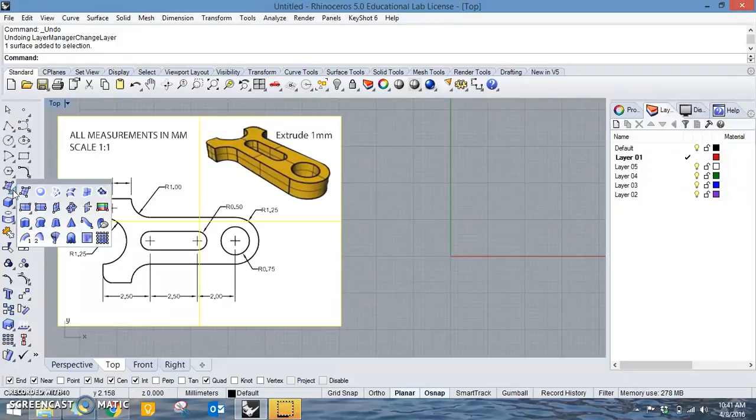Okay, here's a video to actually share with you how to draft out that part and then extrude 1 mm high. Okay, the first thing you want to do is to insert picture frame and drop the image here. Rather than going to and fro to check the drawing, you can always insert the image as a reference. Okay, how do you actually do it? It's similar to the Android and Adidas logo. Go to here and then insert picture frame.

Okay, the next thing, after you studied the drawing, everything is in mm, 1 mm, 0.5 mm, 0.75, 0.5. What you can do is to go to File, Properties. Under Grid, you can always drop your minor grid lines. Rather than it's at 1 mm, you want to drop it at 0.1 mm so that your artwork in Rhino doesn't look too small. It's appropriate to the gridding.

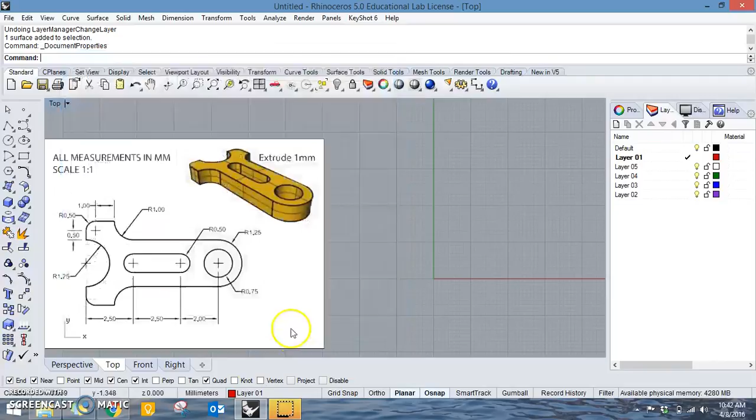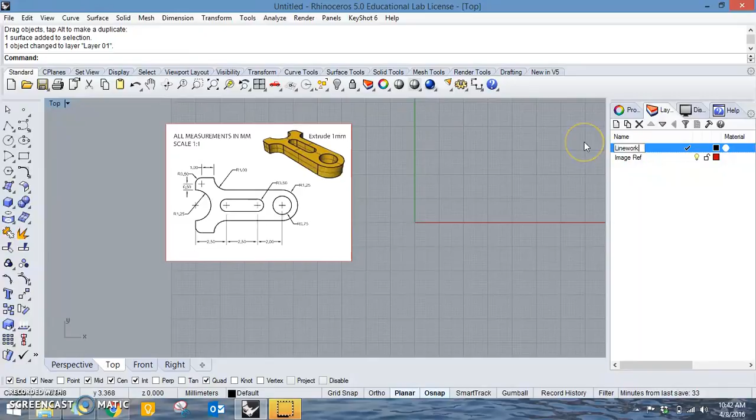Okay, next we can do is to organize our Rhino. Delete what we do not want. We can always drop this change object layer, call this image reference, and then rather than call it default, we call it line work. Okay, so now we can start to draft.

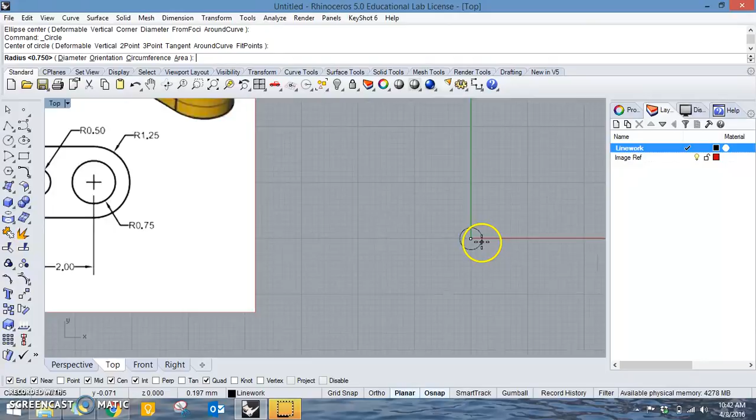The first thing, if you notice, why not we start off with the circle. Okay, let's just find a center anywhere. You want to make sure that it's in radius, not diameter. So the radius is 0.75, enter. Okay, the next one is a 0.5 radius here. So what we can do, snap to center, 0.5, and then it's actually 2 mm away.

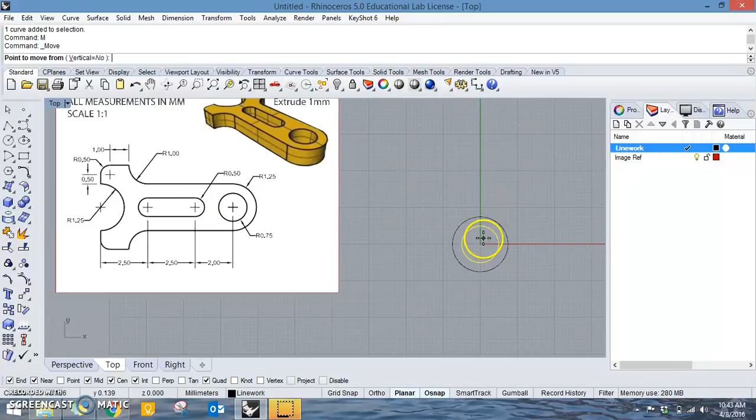Next we can always do move 2 mm away. Let's shift this over. Okay, another one more will be here, the 0.5 at 2.5 mm away also. So copy, paste, and then move it 2.5 mm away. So once that's done, you can always draw a line on the quad or the ends. Okay, let me just off this. Let me just off mine here. Okay.

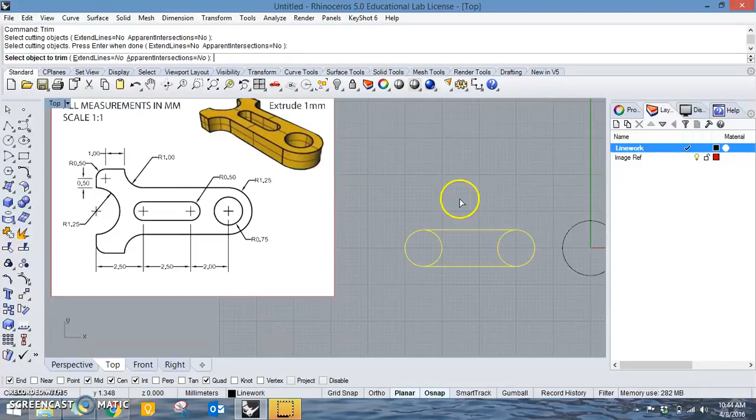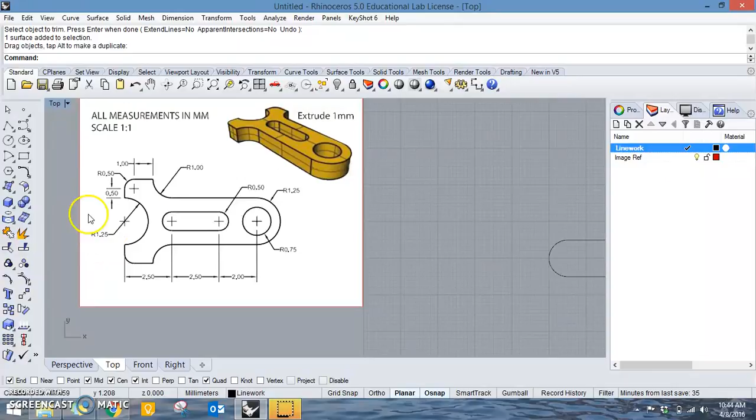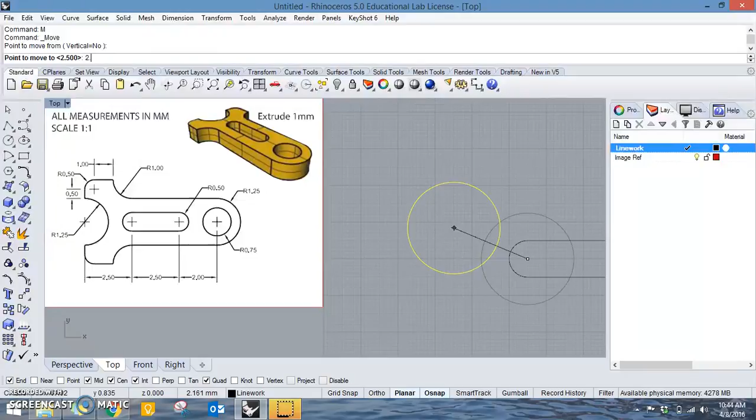Okay, once you have that, you can always start to trim. Select both, trim the inner circles or inner line work. So now you already have this circle, this line work. Let's move on to here. Okay, so it's 2.5 mm away with a 1.25 radius here, this circle. So let's draw a circle here. Snap to the center, 1.25 radius, and then we move it 2.5 mm away. Right? So now we have this and this and this.

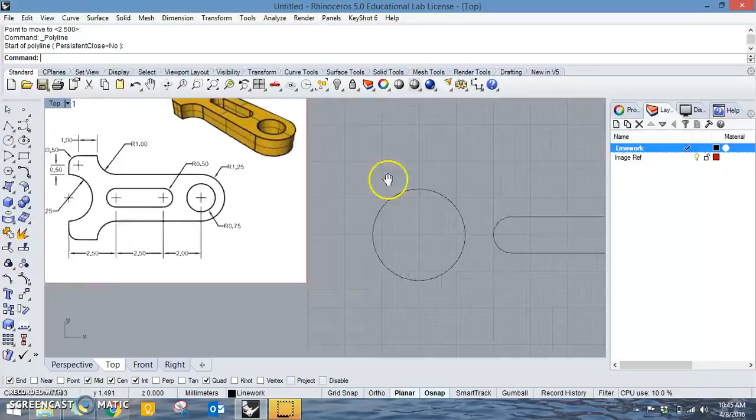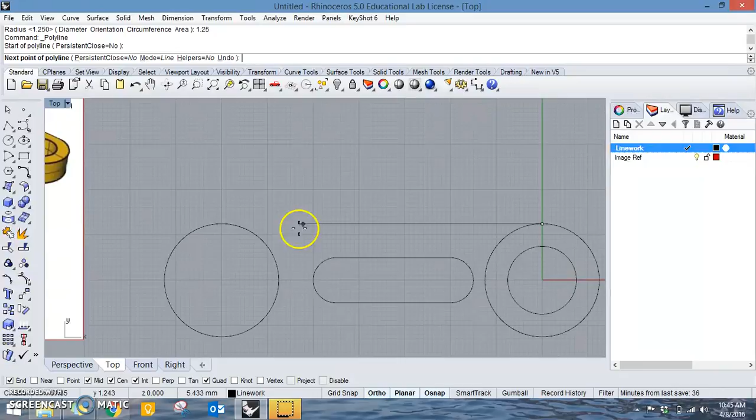Next one we can always do is to offset or draw this outer circle. So let's go draw this first. Get your circle, snap to center. Okay, the radius here is 1.25. Once that's done, we do not know the length here, so we can always just draw a line across first. We know that this is 1 mm radius, but we are not so sure where, so we can always start to draft out the other elements first. Yeah, so let's draw this portion first.

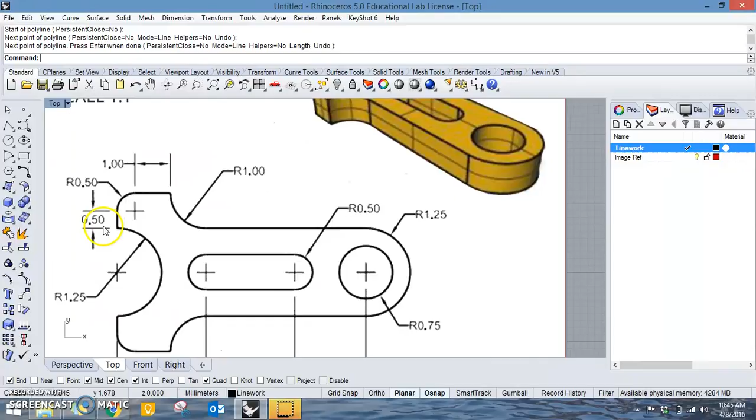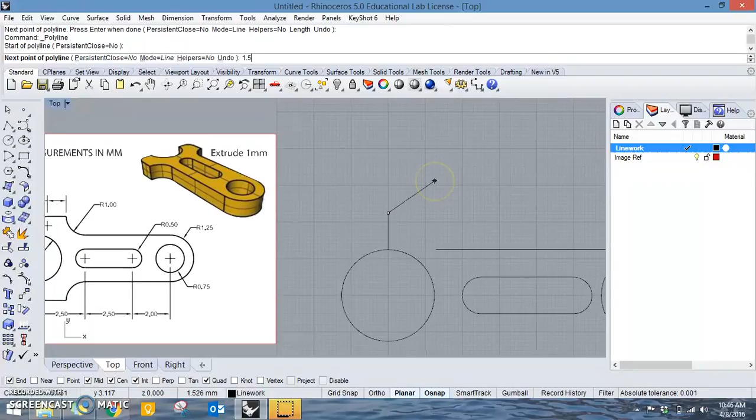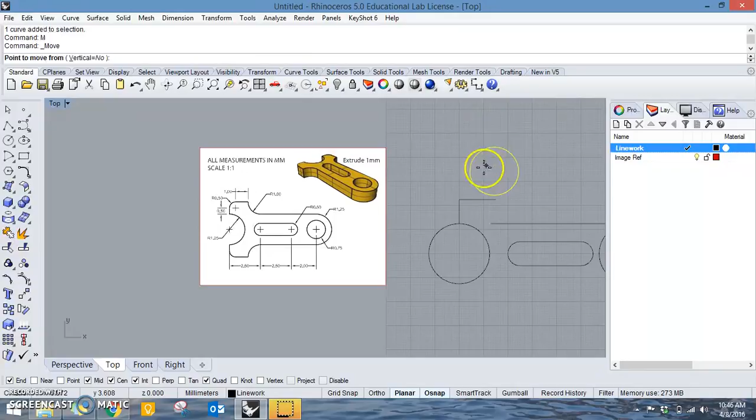If it's a 0.5 here and a 0.5 radius here, then there will be 1 mm away. Okay, press shift, lock it. If it's a 1 mm here and a 0.5 radius here, it will be 1.5 mm away here. So now that we have this, we can actually plot out this 1 mm radius here. So what I did was I draw a circle again with a radius of 1, and I move my quad here, snap it to the edge here. So this will be a 0.5 radius here, 1 mm, and here will be 1 mm in radius,

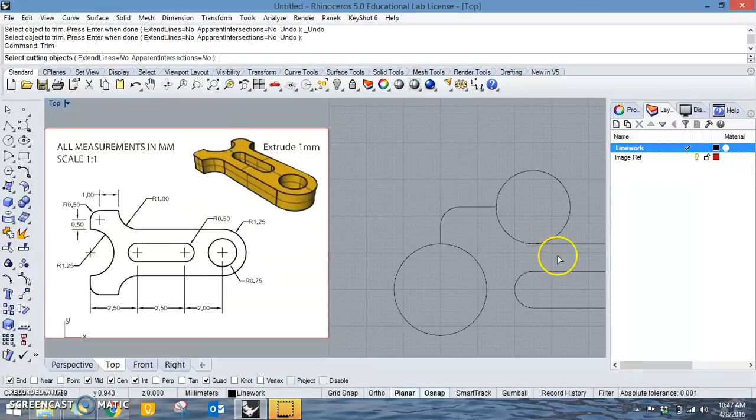the length and offset. So what I can do now is to start to fillet first, yeah? You can always fillet these two lines. Select 0.5, first curve, second curve. Yeah. Next we can trim. Trim away what we do not want. Okay, again. Next we can select all these lines, join them up, mirror over.

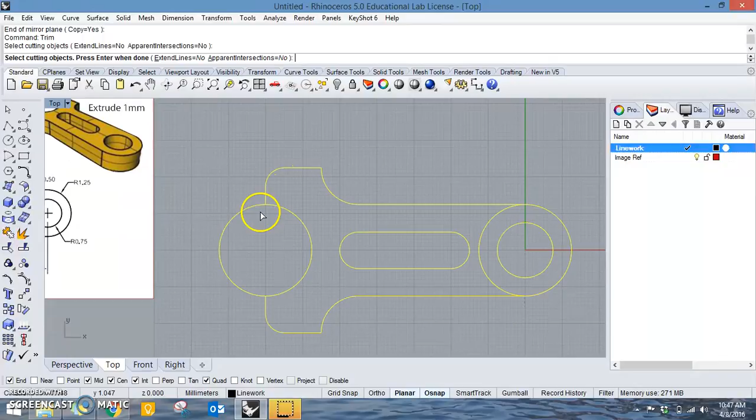Once we have that, we can trim. You can select every single thing, delete what you do not want, and there you have it. Join every single thing up, and then go to your drafting tool. Inside drafting tools, we need to check the dimensions. Let's go to linear dimensions first.

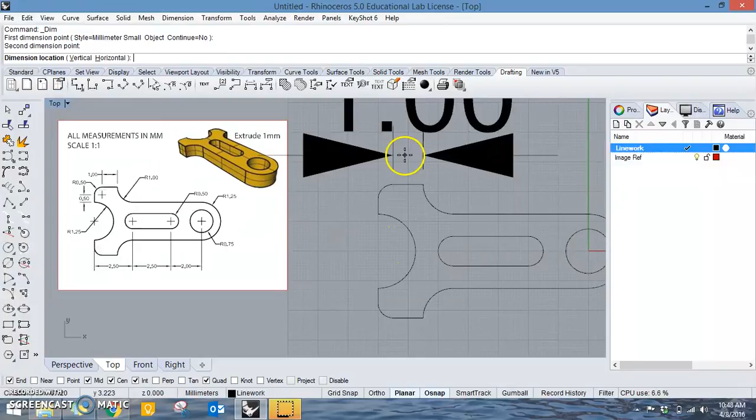Okay, this is 1, correct, right? If it's too big, how do you adjust? You can always go to dimension style, mm small. So we need to adjust it. Rather than a 2.5 mm height for the text, we drop it to 0.3. Preview. Looks fine, right? But right now the arrows are way too big.

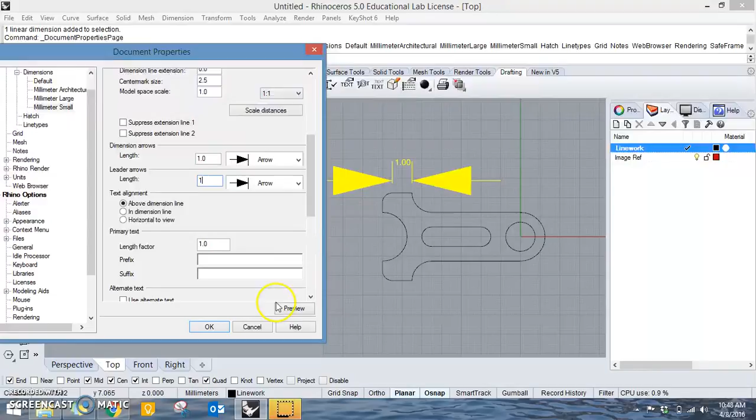So let's drop the arrow. So the arrow, let's try a 1 mm. A 1 unit is too big too. Let's drop to 0.3. Yep, a 0.3 looks just right. So you can click OK.

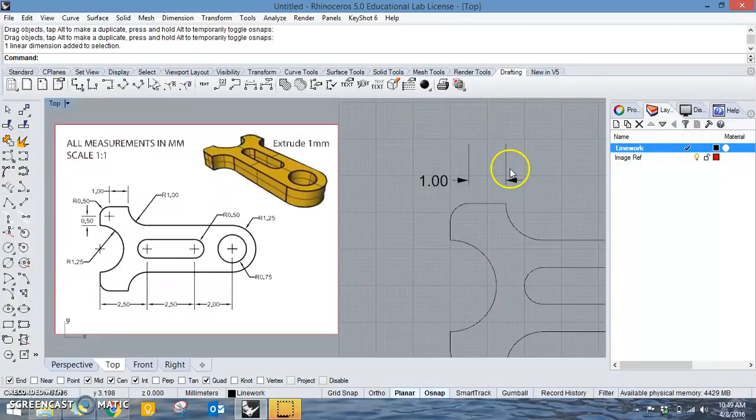How do you actually shift the lines away? You can always press F10. You can drag the one elsewhere, right? Okay. The gap here, how can we reduce it? We can always go to dimension style again, edit. Okay, text gap will be here. Rather than 0.8, let's try a 0.2.

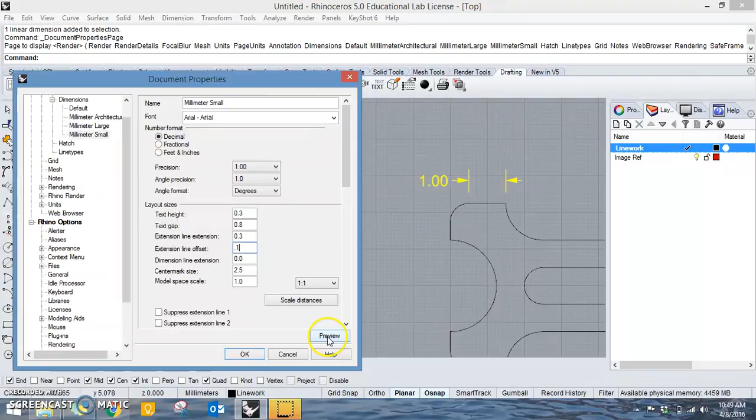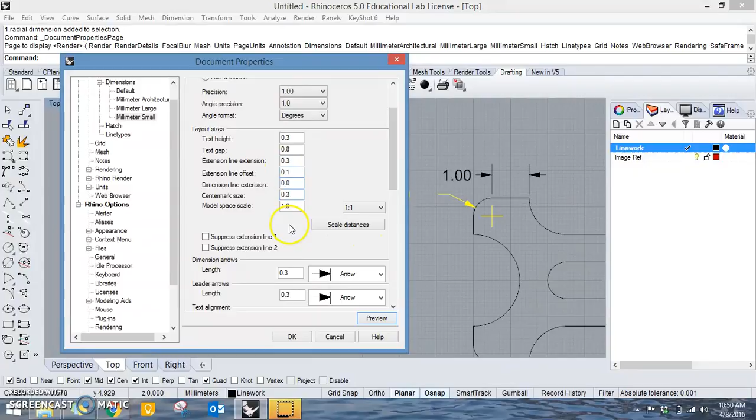The next one we want to check is the radius. Let's just drop a radius here. Okay, right now the center mark is too big. We can always go to dimension styles, edit, center mark style, center mark size. Yes, this one. Let's try 0.3 also. Preview. If it's too big, drop it again. Let's drop it to 0.1 instead. Too small. Let's just drop to 0.2. Yep, looks about just right. You can press F10.

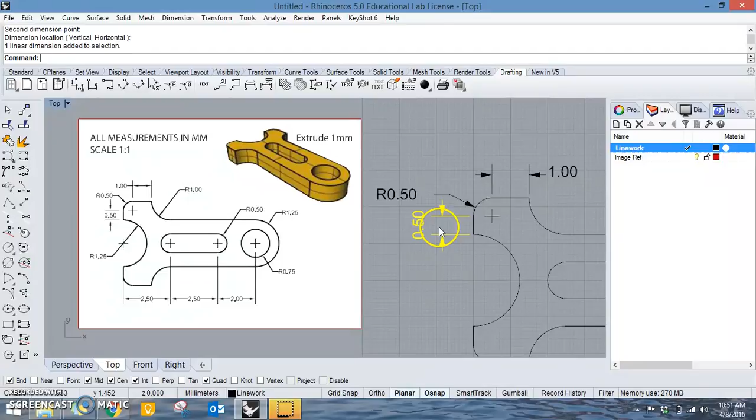Hold on, let me just edit some other stuff. 0.5. 0.5. Let me just drop it here so it's easier to see. Okay, F10 again. Yeah, looks about just right. Let's try this portion. Okay, it's a 0.5. Let's try this. Oops.

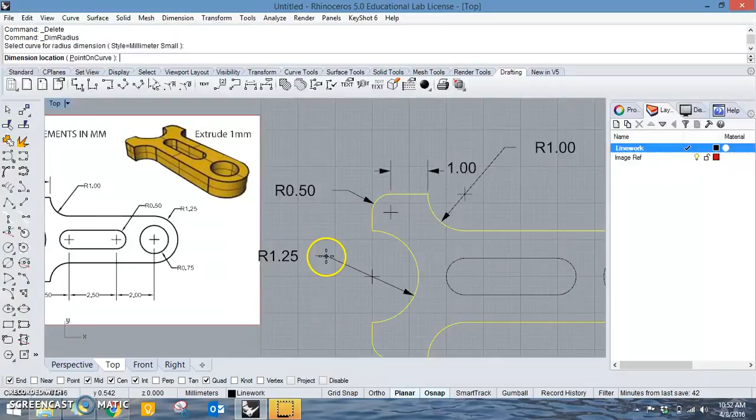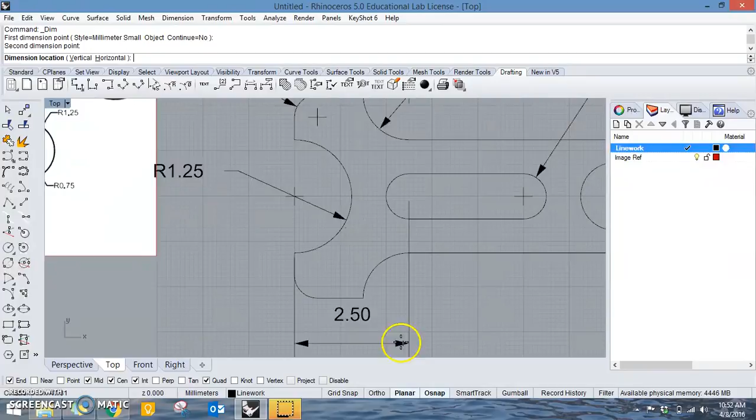Let's just try to check the radius. This is 1.25. This is 1.0. Correct. Oops. This one we can delete. Okay. Let's try this one. It's 0.5. 0.75. Yes. 2.5. Let's just check. Yep, it's correct. Snap to center. 2.5. Correct. Center to center. 2. Correct.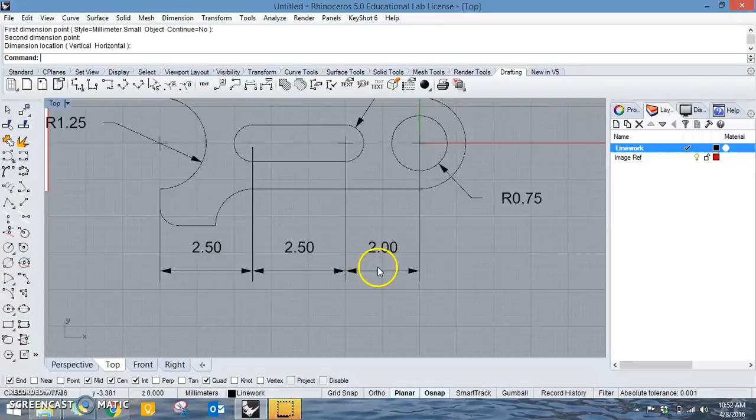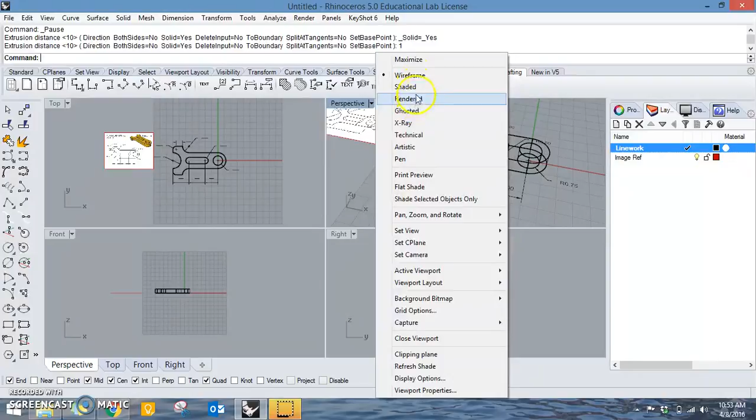So the last thing that we need to do for this is to go to solid, extrude planar curve, straight. Let's just try extrude 1. Check. So right now, if it's all in line work, you can't really tell. You can go to perspective, change to shaded mode, and double check. Okay.

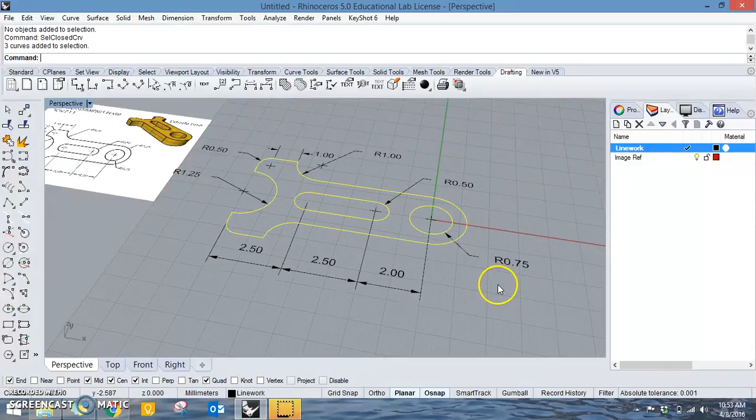Again, like what I shared, let's hide this first. We can always do a select open curve. There's no open curve. Select closed curve. Yeah, this is all closed. So we bring it back. This object, we can select this object. We go to analyze, edges, show edges. Go to naked edges. Zoom. Alright, there's no naked edges, meaning it's all watertight. There's no open surface. Yep, so this artwork is fine for submission.

Okay, try the exercise. If you are not so sure, you can always refer to the video, pause anytime that you like. If any doubts, you can always find me.